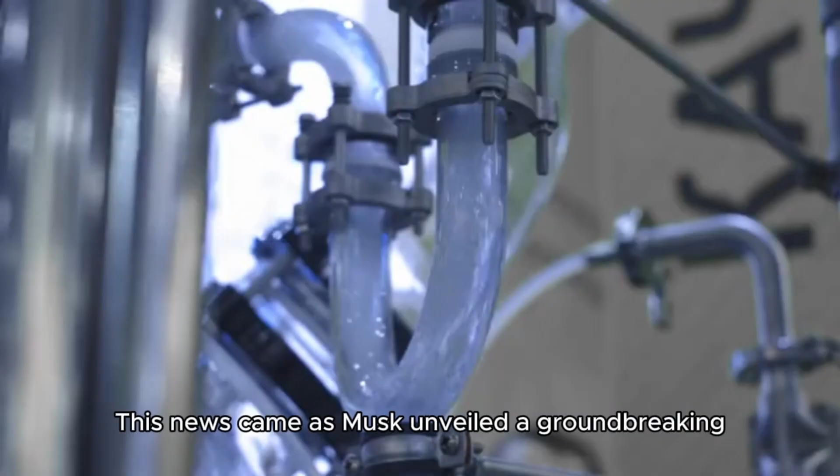Elon Musk has made an exciting announcement about the approval to make the first cars, possibly as soon as October. This news came as Musk unveiled a groundbreaking new water engine that promises to revolutionize the future of transportation and energy. After years of skepticism and numerous innovations, Musk's latest venture paves the way for unparalleled environmental sustainability. But what makes this water engine so unique, and how will it impact the world? Join us as we delve into the mechanics of Musk's incredible invention and explore the far-reaching implications of this game-changing technology.

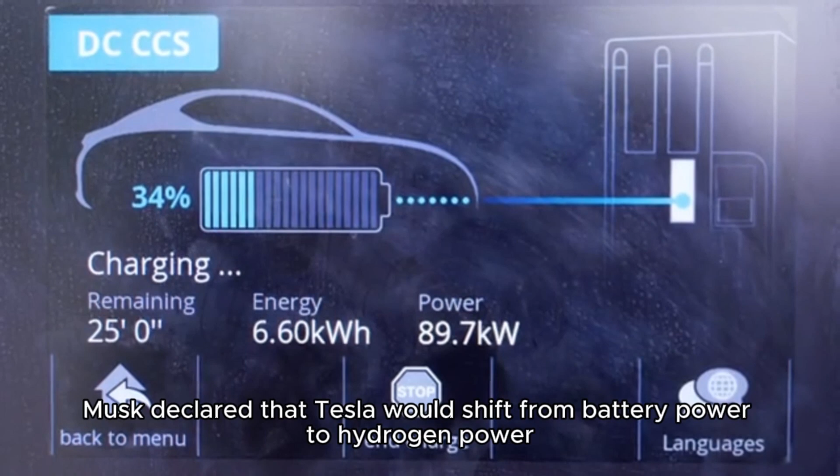Elon Musk abruptly announced a major change in Tesla's direction on X, formerly known as Twitter. In an unexpected twist, after years of doubt surrounding hydrogen fuel cells, Musk declared that Tesla would shift from battery power to hydrogen power. This decision marked a significant change in Tesla's business strategy. Many were surprised by the announcement, given Musk's previous criticism of hydrogen fuel cells, which he famously referred to as fool cells. The shift was driven by challenges in mass-producing the 4680 battery cells, prompting Tesla to reconsider its approach to sustainable energy solutions.

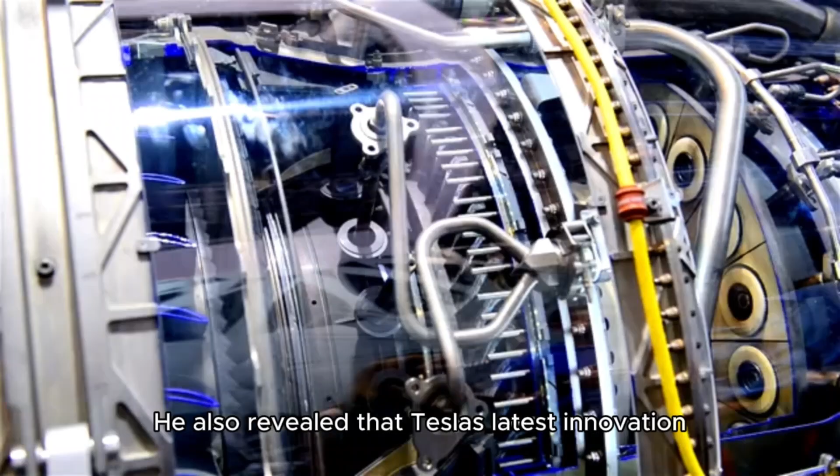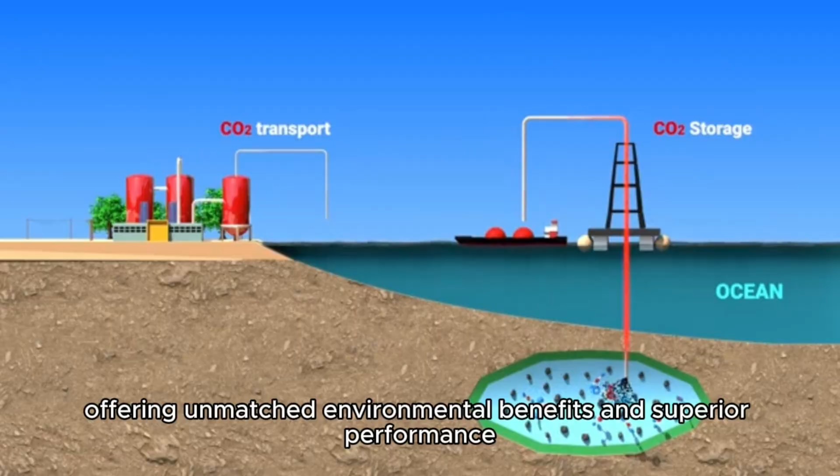However, Musk didn't stop there. He also revealed that Tesla's latest innovation, the revolutionary water engine, would be at the forefront of this transition. This groundbreaking technology promises to redefine how engines work, offering unmatched environmental benefits and superior performance. What makes the water engine so revolutionary, and how will it impact the automotive industry and beyond?

Elon Musk, the visionary behind Tesla and SpaceX, has always been driven by a commitment to cutting-edge technology and environmental sustainability. His goal is to create a future where technology enhances our lives while protecting the planet. Musk's relentless pursuit of innovation has consistently pushed the boundaries of what is possible, earning him a reputation as a modern-day pioneer.

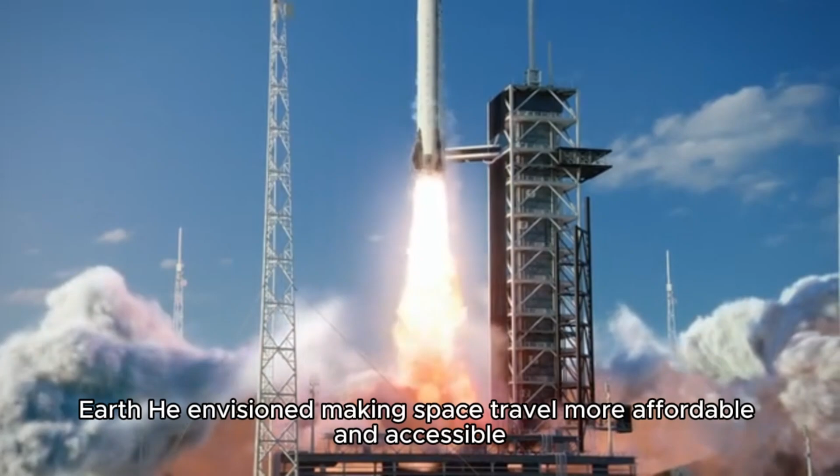Musk's vision for Tesla wasn't just about creating electric cars, but about transforming the entire automotive industry. He aimed to show that electric vehicles could be faster, safer, and more enjoyable to drive than their gasoline-powered counterparts. This mission extended beyond cars; it was about accelerating the world's transition to sustainable energy. With SpaceX, Musk's ambitions went beyond Earth. He envisioned making space travel more affordable and accessible, with the ultimate goal of colonizing Mars.

SpaceX's achievements, including the successful landing and reuse of rockets, have revolutionized the space industry, demonstrating Musk's ability to turn ambitious dreams into reality. Musk's journey in renewable energy and transportation is marked by several key milestones.

Tesla, founded in 2003, initially faced skepticism. At the time, electric cars were considered impractical and inefficient. However, Musk's perseverance paid off. Tesla's first vehicle, the Roadster, showcased the potential of electric cars with its impressive performance and range.

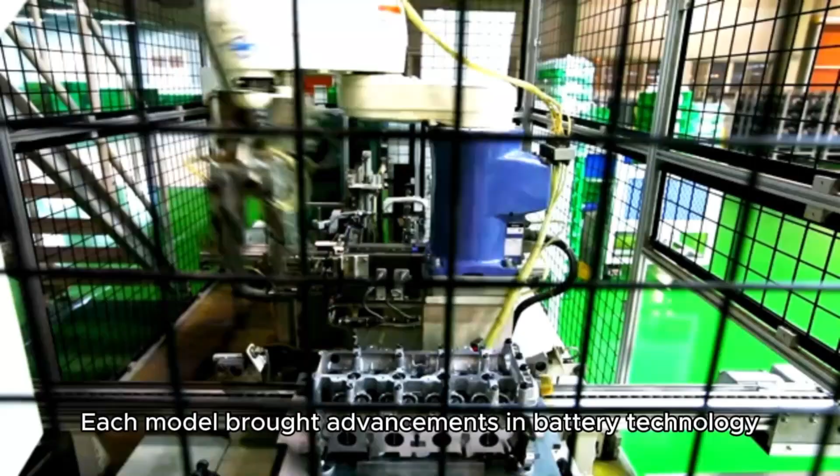The subsequent releases of the Model S, Model X, Model 3, and Model Y solidified Tesla's position as a leader in the electric vehicle market. Each model brought advancements in battery technology, driving range, and autonomous driving capabilities, making electric cars increasingly viable for everyday use.

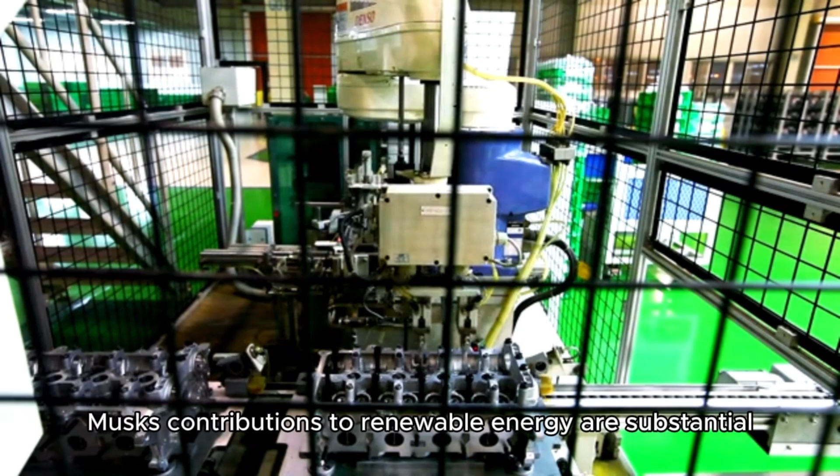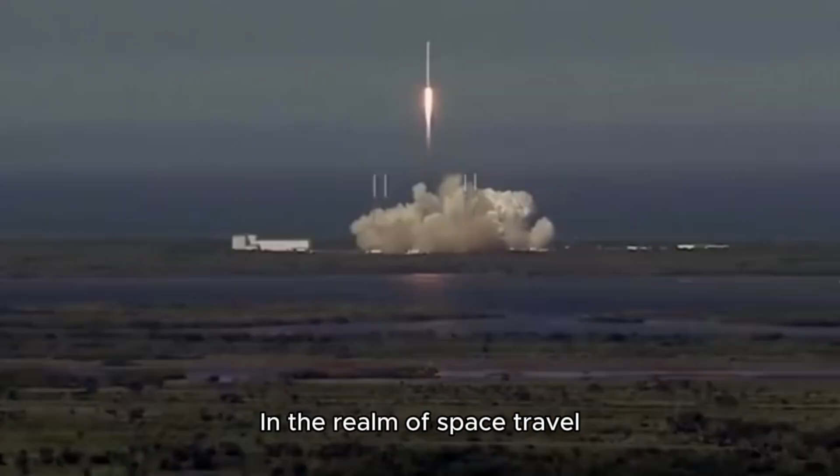Beyond vehicles, Musk's contributions to renewable energy are substantial. Tesla's Powerwall and solar roof products aim to create a sustainable energy ecosystem for homes and businesses by integrating solar energy generation with efficient energy storage. Through these innovations, Musk has provided practical solutions for reducing dependence on fossil fuels.

In the realm of space travel, SpaceX has achieved remarkable milestones. The Falcon 9 rocket's ability to land and be reused has significantly reduced the cost of space missions. The successful deployment of the Starlink satellite constellation, which aims to provide global internet coverage, further emphasizes Musk's far-reaching impact on technology and innovation.

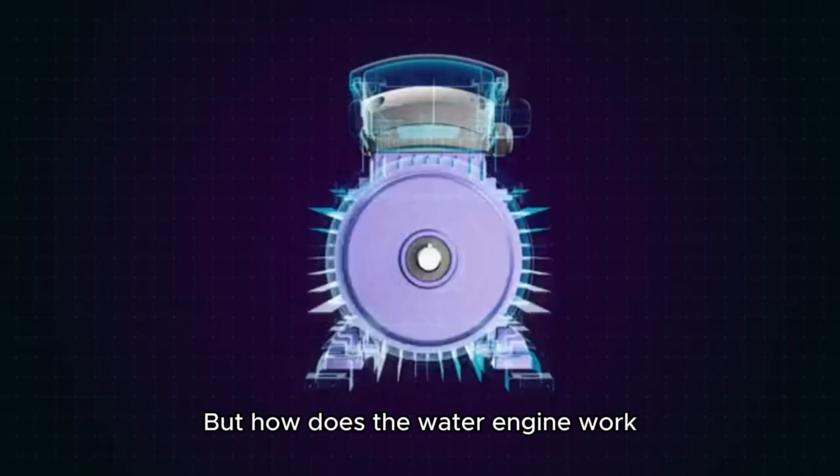The water engine operates on a simple yet ingenious principle: it uses water to generate energy. This process fundamentally distinguishes it from traditional combustion engines, which rely on burning fossil fuels, and from electric engines, which depend on battery power. But how does the water engine work?

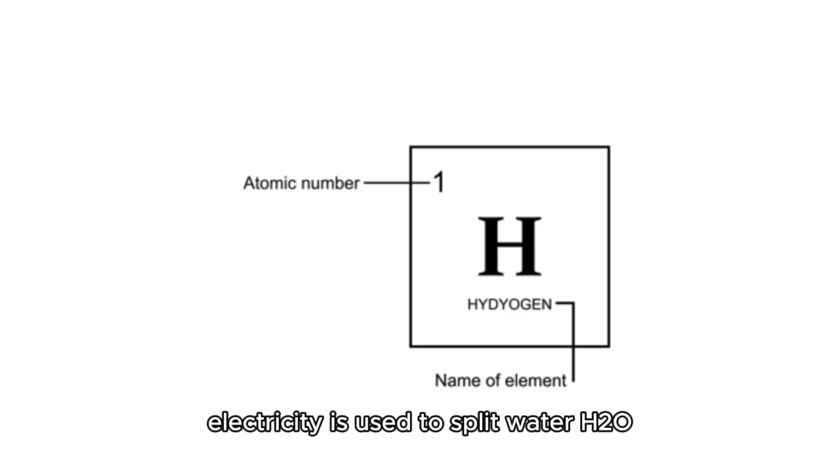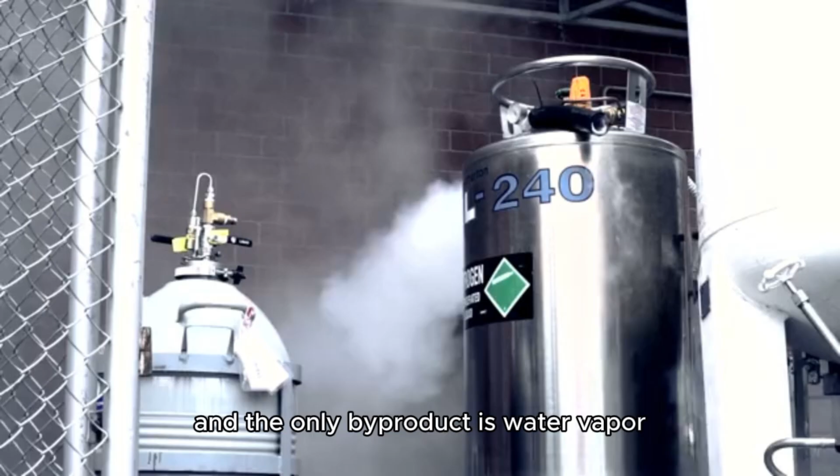At its core, the engine uses a method called reverse electrolysis. In conventional electrolysis, electricity is used to split water, H2O, into hydrogen (H) and oxygen (O). In reverse electrolysis, the process is flipped: hydrogen and oxygen are combined to produce electricity, and the only byproduct is water vapor, making this an exceptionally clean technology.

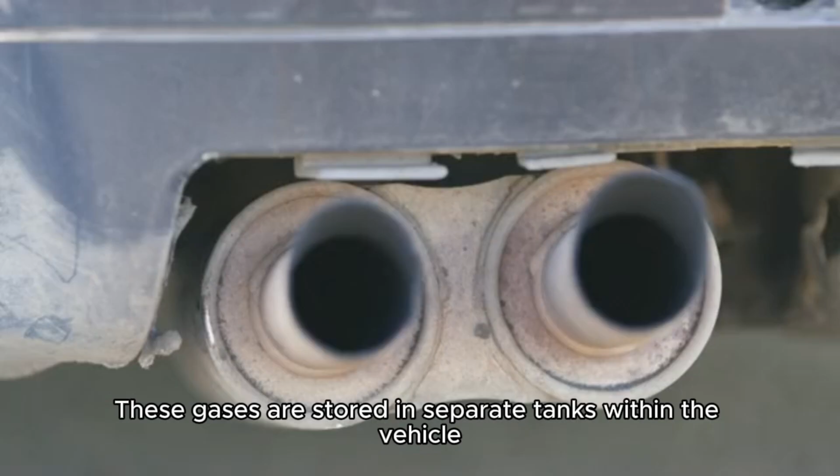So, what are the mechanics behind this impressive technology? The water engine's mechanics are a blend of fuel cells, reverse electrolysis, and hydrogen-oxygen reactions. Let's break it down step by step. First, water is introduced into the system.

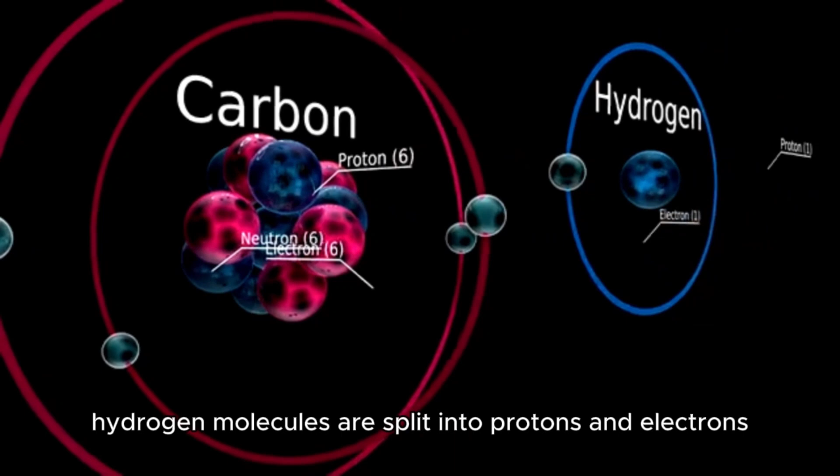The engine then splits the water into hydrogen and oxygen using an initial energy input. These gases are stored in separate tanks within the vehicle. When the engine is running, hydrogen from the tank is fed into the fuel cell. In the fuel cell, hydrogen molecules are split into protons and electrons.

The electrons are used to create an electric current, which powers the vehicle's electric motor. Meanwhile, the protons move through a membrane and combine with oxygen from the air, producing water vapor as the only emission. This process is incredibly efficient, continuously generating electricity as long as hydrogen and oxygen are available.

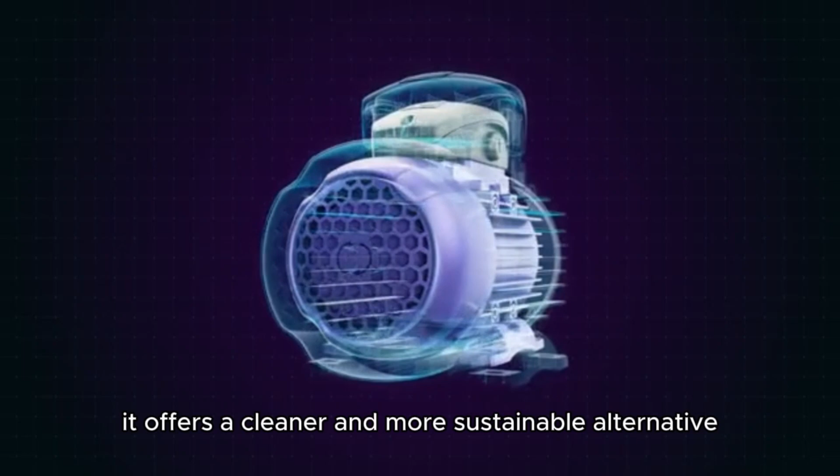But how efficient is the water engine compared to traditional and electric engines? The answer is quite promising. Traditional combustion engines have an efficiency rate of about 20 to 30%, meaning a significant amount of energy is lost as heat. Electric engines, while more efficient at around 85 to 90%, still face challenges such as long charging times and battery degradation. The water engine, however, boasts an efficiency of approximately 60%, placing it between combustion and electric engines. More importantly, it offers a cleaner and more sustainable alternative.

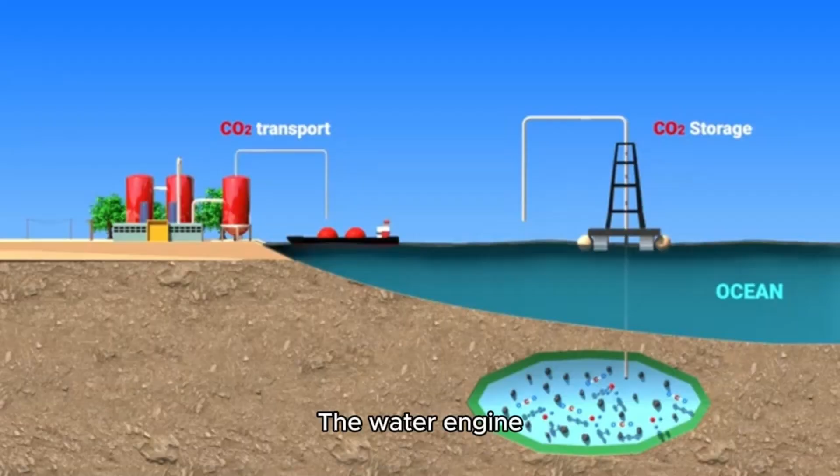Another critical performance metric is range. Traditional electric vehicles, EVs, often suffer from range anxiety, with current models typically offering between 200 to 300 miles per charge. The water engine, leveraging the high energy density of hydrogen, can achieve ranges comparable to or even exceeding those of fossil fuel-powered vehicles. Imagine driving a car that emits only water vapor and never worrying about running out of power during a trip.

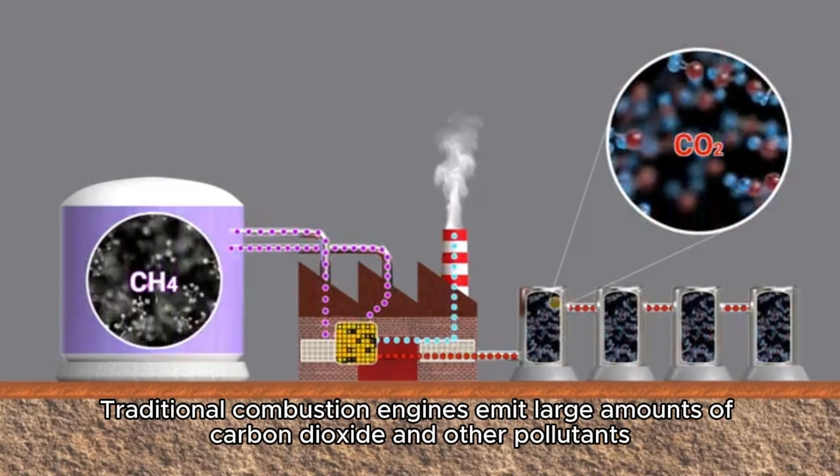One of the most significant advantages of the water engine is its potential to drastically reduce our carbon footprint. Traditional combustion engines emit large amounts of carbon dioxide and other pollutants, contributing to climate change and air pollution. In contrast, the water engine produces only water vapor as a byproduct, making it an exceptionally clean alternative. To put this into perspective, the average gasoline-powered car emits about 4.6 metric tons of carbon dioxide annually.

Transitioning to water engines could eliminate these emissions entirely. Moreover, the elimination of nitrogen oxides and particulate matter would lead to significant improvements in air quality, particularly in urban areas. Comparatively, electric vehicles are also cleaner than fossil fuel-powered cars, but are not without their environmental costs.

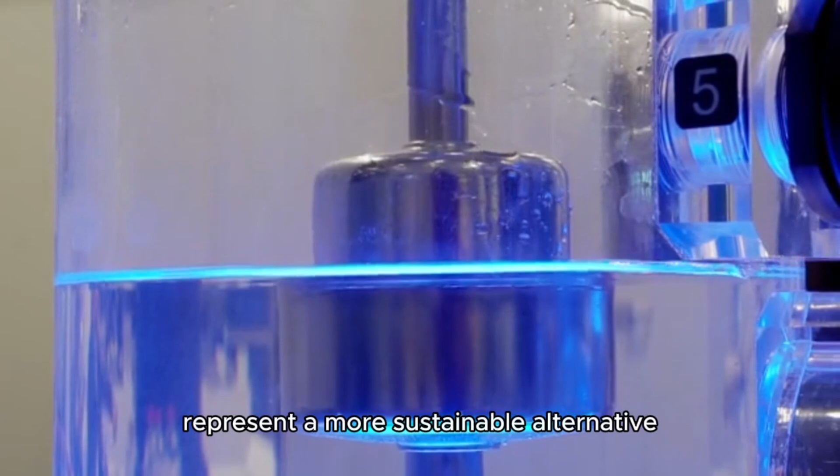The mining of lithium, cobalt, and other rare earth metals required for batteries has substantial ecological impacts. Additionally, if the electricity used to charge EVs is sourced from non-renewable power plants, the overall reduction in carbon emissions is less pronounced. Hydrogen fuel cells, however, represent a more sustainable alternative.

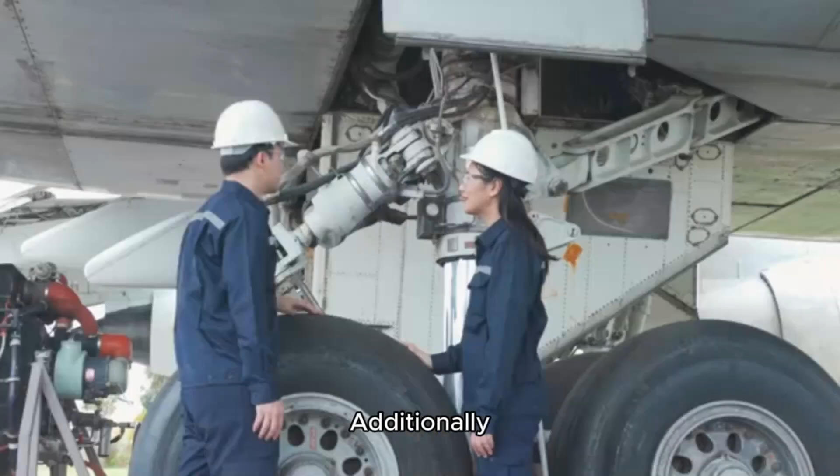Another clean alternative produces only water as a byproduct. However, the production of hydrogen typically involves natural gas, which results in indirect carbon emissions. Additionally, hydrogen storage and transportation pose challenges due to its low energy density and the need for high-pressure tanks.

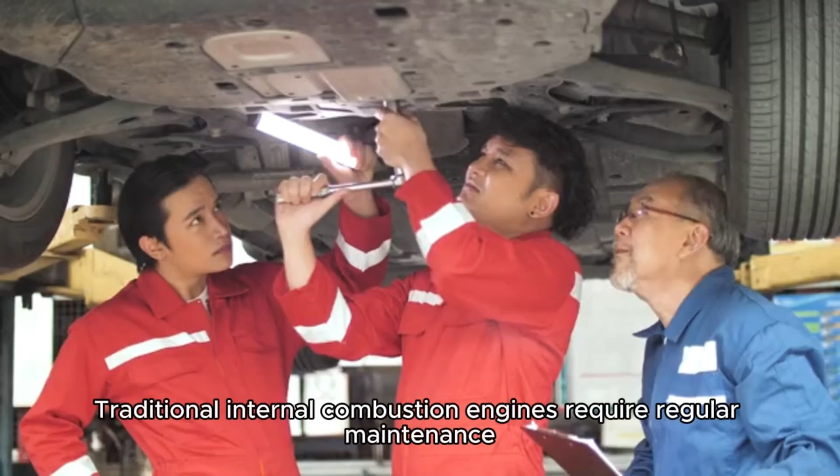The water engine, utilizing reverse electrolysis, has the potential to offer a more efficient and environmentally friendly solution. By using renewable energy sources to produce hydrogen, the entire life cycle of the water engine becomes sustainable, further reducing its environmental footprint. Economically, the water engine could bring substantial cost savings in the long run.

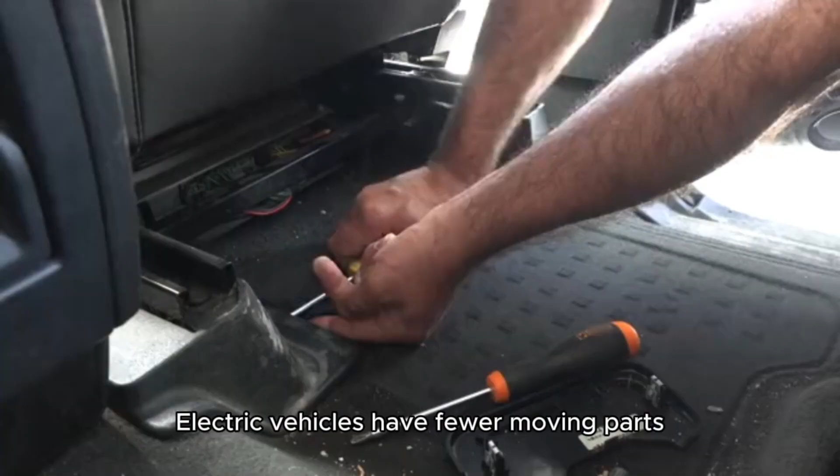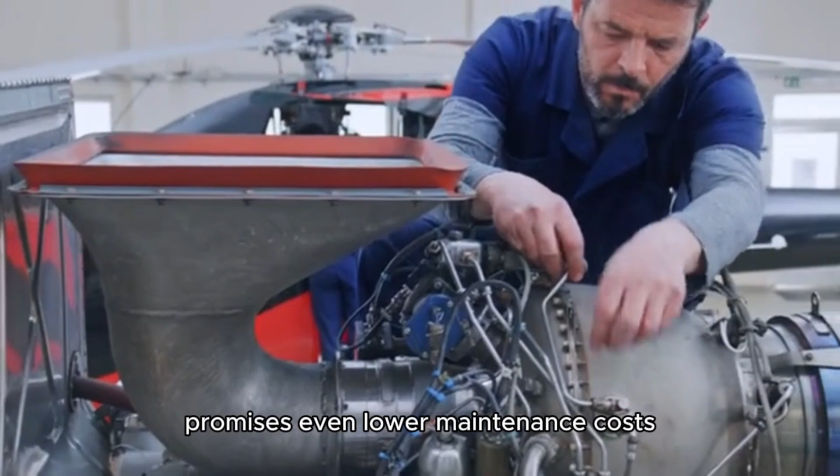Traditional internal combustion engines require regular maintenance, including oil changes, exhaust system repairs, and engine tune-ups, which can be expensive over time. Electric vehicles have fewer moving parts, reducing maintenance costs, but still require costly battery replacements that are environmentally taxing. The water engine, with its simpler mechanics and fewer moving parts, promises even lower maintenance costs.

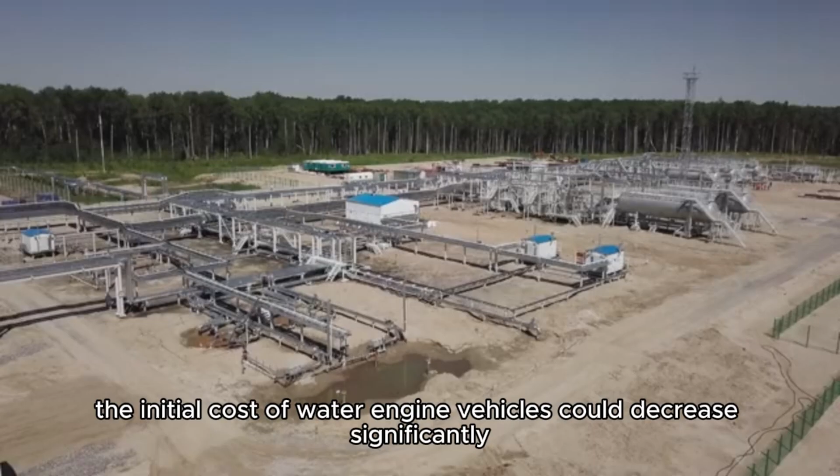Components like fuel cells and electrolysis systems are designed for durability, potentially extending the lifespan of vehicles. As the technology matures and economies of scale are realized, the initial cost of water engine vehicles could decrease significantly, making them more accessible to the average consumer. However, the transition to water engines will require significant initial investment.

Developing the infrastructure for water refueling stations is a massive undertaking. This involves either building new stations or retrofitting existing ones to accommodate water refueling technology. The cost and logistics of establishing a widespread network of refueling stations will require substantial collaboration between governments and private companies.

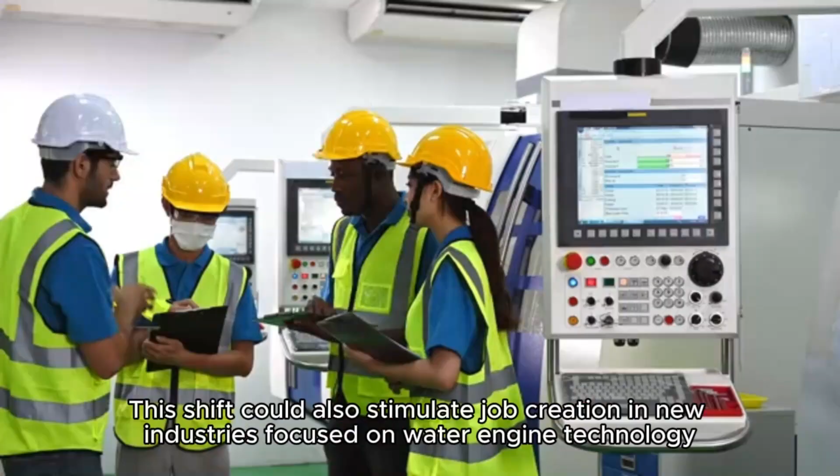On a broader economic scale, the adoption of water engines could reduce global dependence on oil, leading to more stable fuel prices and potentially reducing geopolitical tensions linked to oil supply. This shift could also stimulate job creation in new industries focused on water engine technology, manufacturing, and infrastructure development.

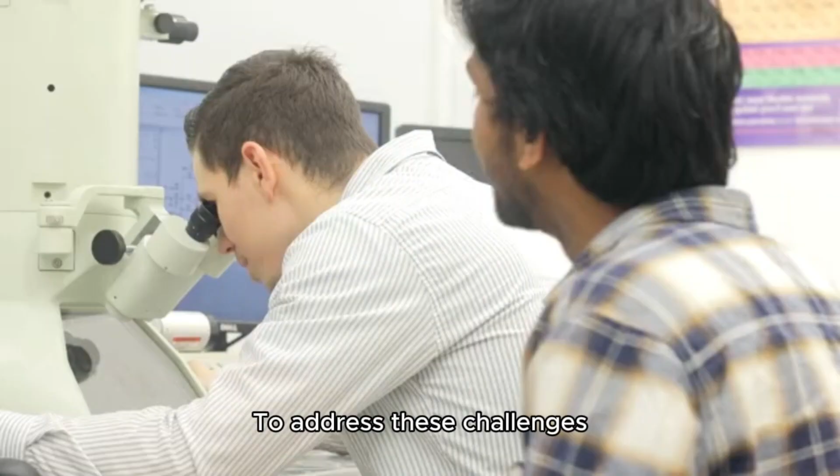The introduction of the water engine represents a significant technological shift in the automotive industry. Transitioning from combustion engines and electric vehicles to water engines involves overcoming various challenges. The current automotive infrastructure is fully rooted in fossil fuels, from manufacturing processes to refueling networks.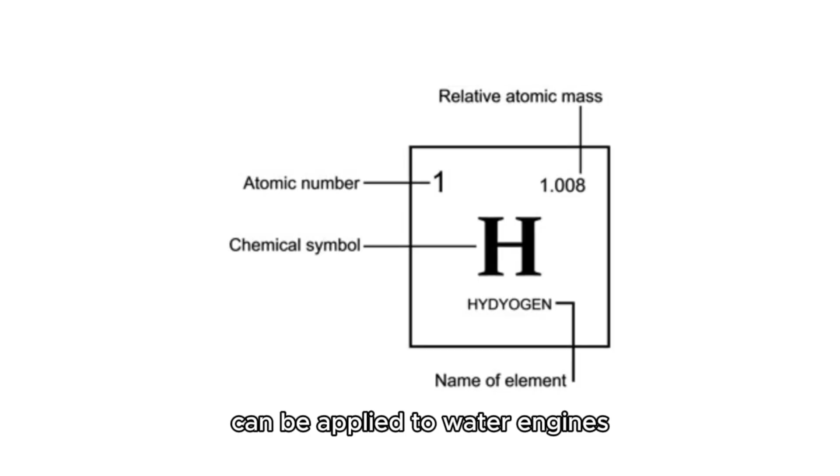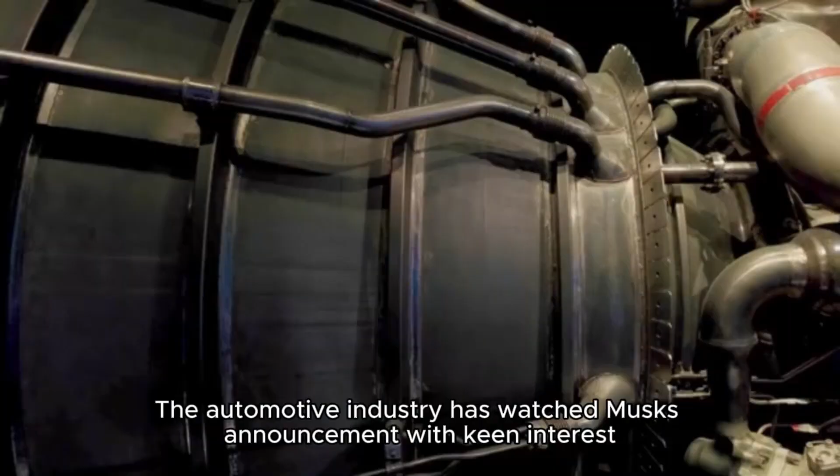To address these challenges, companies can leverage existing technologies and expertise. For example, many principles from hydrogen fuel cell technology, such as fuel cell design and hydrogen storage, can be applied to water engines. This can facilitate faster development and deployment of the new technology.

But what does the future hold for Musk's water engine? Will it redefine our approach to energy and transportation, or will it face insurmountable obstacles?

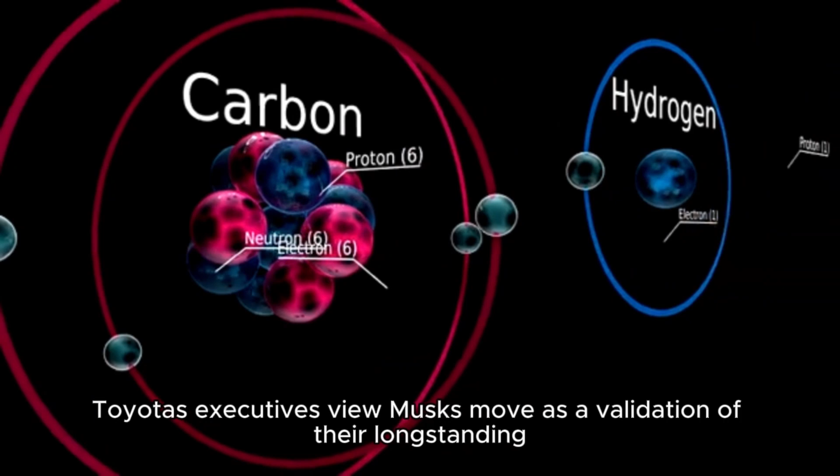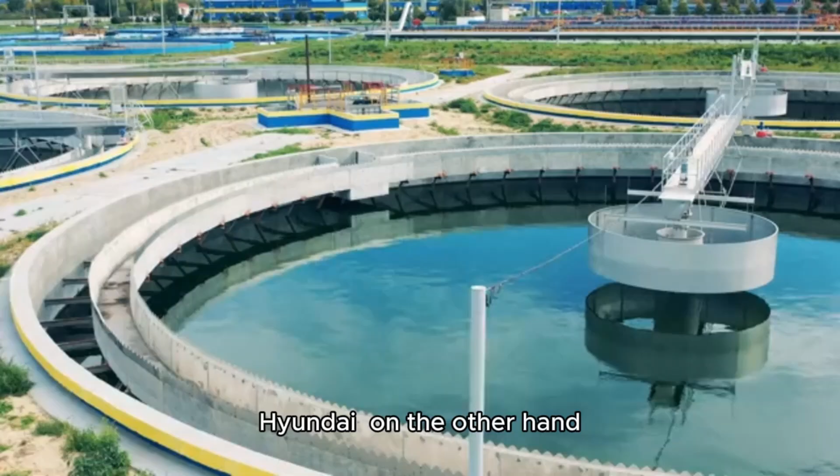The automotive industry has watched Musk's announcement with keen interest. Major players like Toyota and Hyundai, longtime advocates of hydrogen fuel cell technology, have had mixed reactions. Toyota has invested heavily in hydrogen fuel cells with vehicles like the Mirai, and Hyundai has introduced models like the Nexo. Toyota's executives view Musk's move as a validation of their long-standing belief in hydrogen's potential.

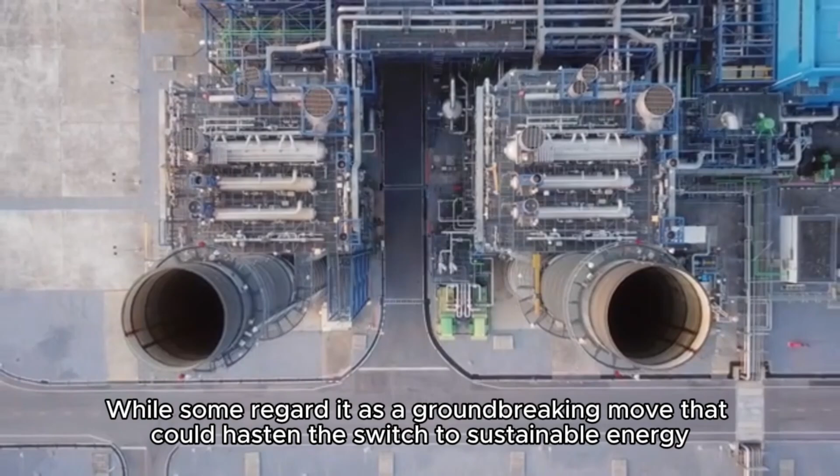They see it as a positive step toward wider acceptance and investment in hydrogen infrastructure. Hyundai, on the other hand, is cautiously optimistic, recognizing the competitive push but also the significant market development needed to support both hydrogen and water engine technologies.

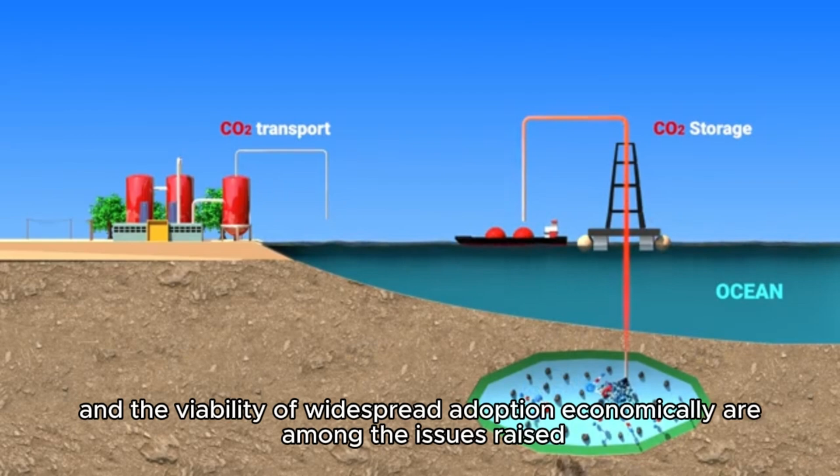The feasibility of the water engine has been discussed by analysts and industry specialists. While some regard it as a groundbreaking move that could hasten the switch to sustainable energy, others are dubious about the real-world difficulties. The technology's efficiency, the infrastructure needed for water refueling, and the viability of widespread adoption economically are among the issues raised.

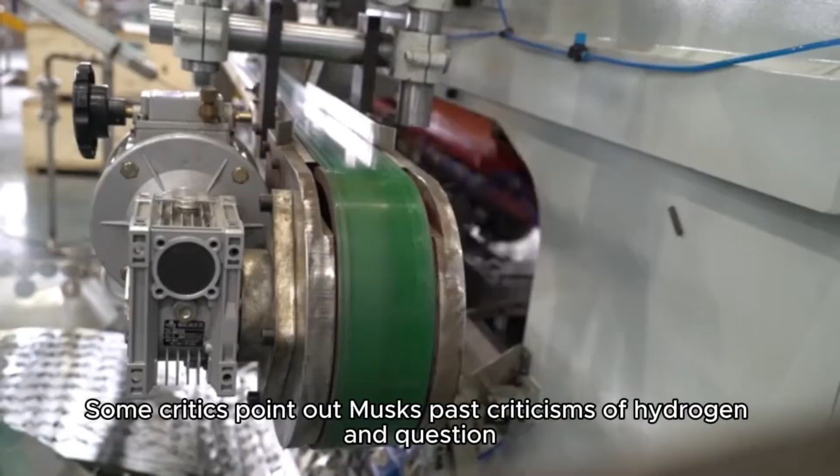Public reaction to Musk's announcement has been a mix of excitement, curiosity, and skepticism. Social media platforms have been abuzz with discussions, as followers of Musk and Tesla enthusiasts express their anticipation for the new technology. Many are intrigued by the promise of a cleaner, more efficient engine and the potential environmental benefits.

However, there are also doubts and concerns. Some critics point out Musk's past criticisms of hydrogen and question the feasibility of a rapid transition to water engines. They worry about the practicality of building a new refueling infrastructure and the initial costs associated with adopting the technology. Will Musk's water engine prove to be the game-changer it promises?

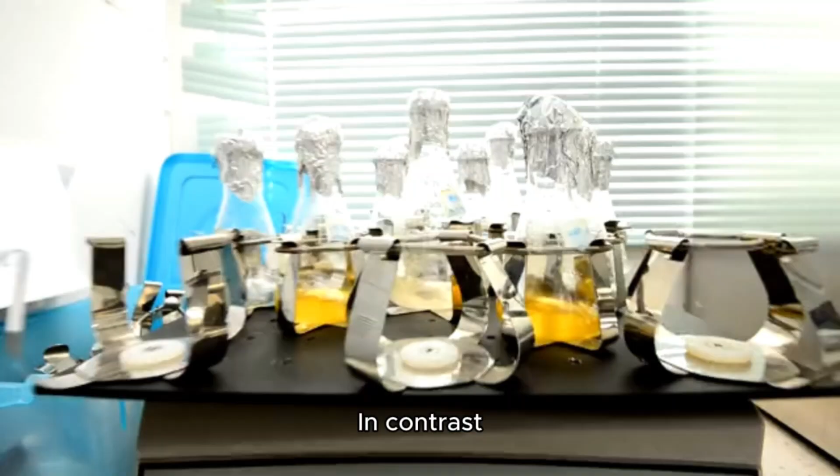One of the most significant challenges in deploying the water engine is the development of a comprehensive refueling infrastructure. Currently, the infrastructure for traditional fossil fuels is extensive, with gas stations available in almost every corner of the globe. Electric vehicle charging networks are also expanding rapidly, thanks in large part to investments by Tesla and other companies.

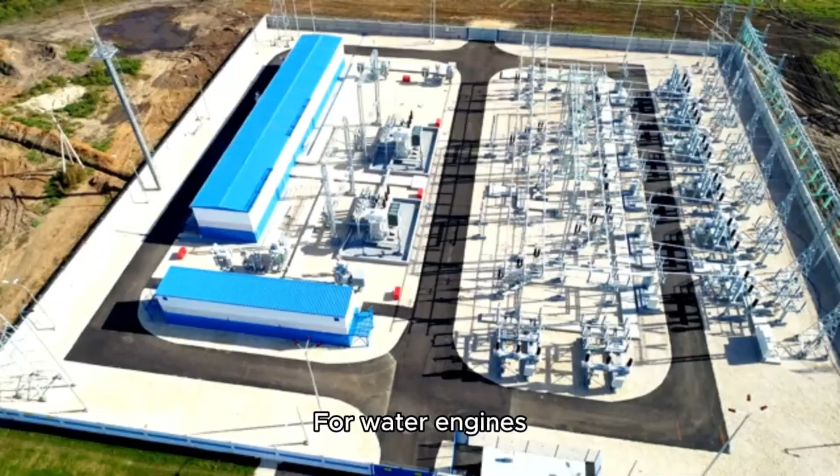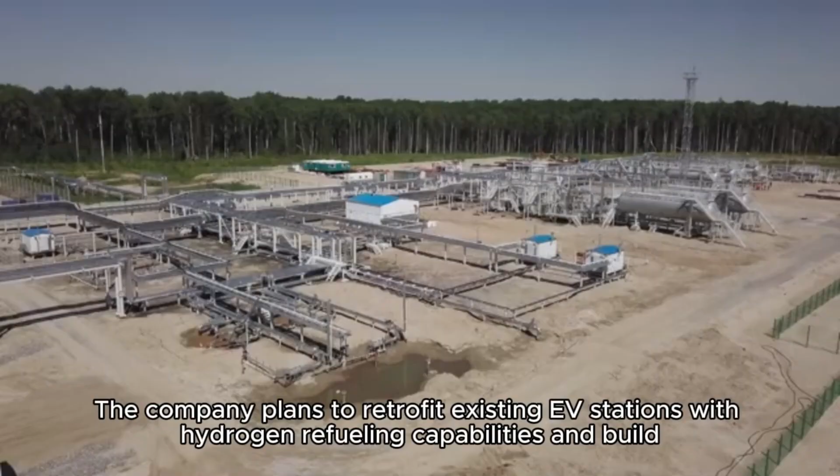In contrast, the infrastructure for hydrogen fuel cells is still in its infancy. There are relatively few hydrogen refueling stations worldwide, concentrated mainly in specific regions like California, Japan, and parts of Europe. For water engines, which rely on a similar hydrogen-based refueling process, this existing network provides a starting point, but significant expansion is required. Tesla's approach to solving this involves leveraging its experience in building out EV supercharging stations.

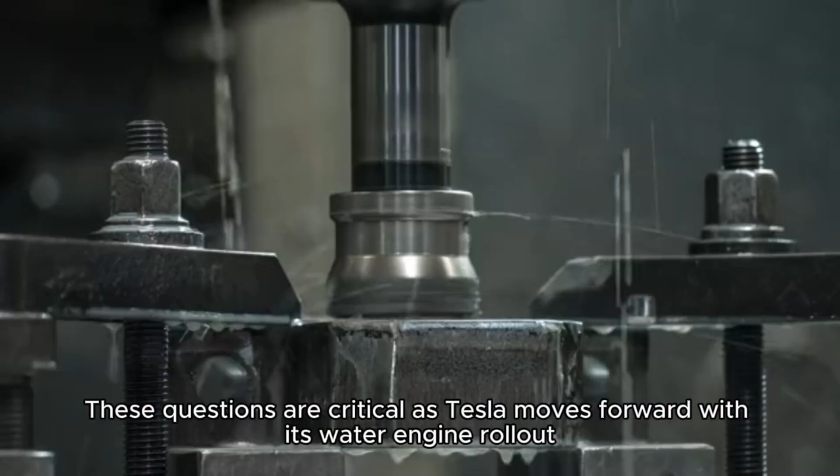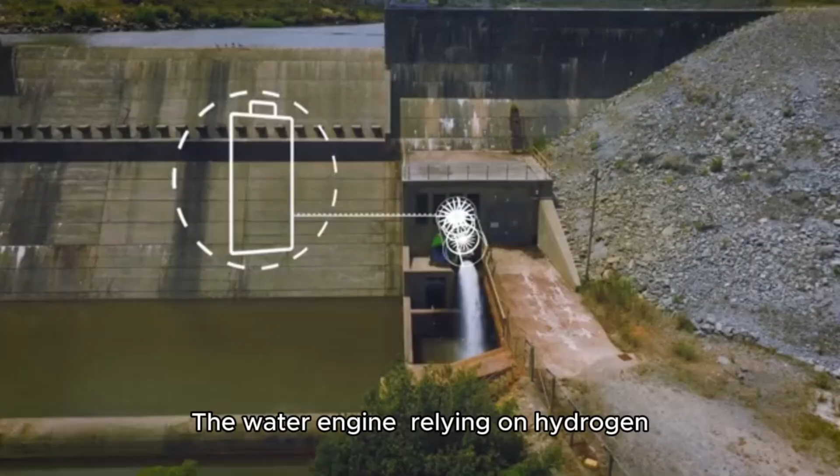The company plans to retrofit existing EV stations with hydrogen refueling capabilities and build new stations dedicated to water engines. This ambitious plan will require substantial investment and collaboration with governments and private sector partners to ensure widespread availability and convenience for consumers. But how quickly can this network be established? What are the logistical and financial hurdles that need to be overcome? These questions are critical as Tesla moves forward with its water engine rollout.

Safety is another paramount concern when introducing a new technology. Hydrogen, while a clean energy source, is highly flammable and must be handled with care. The water engine, relying on hydrogen, inherits these safety challenges.

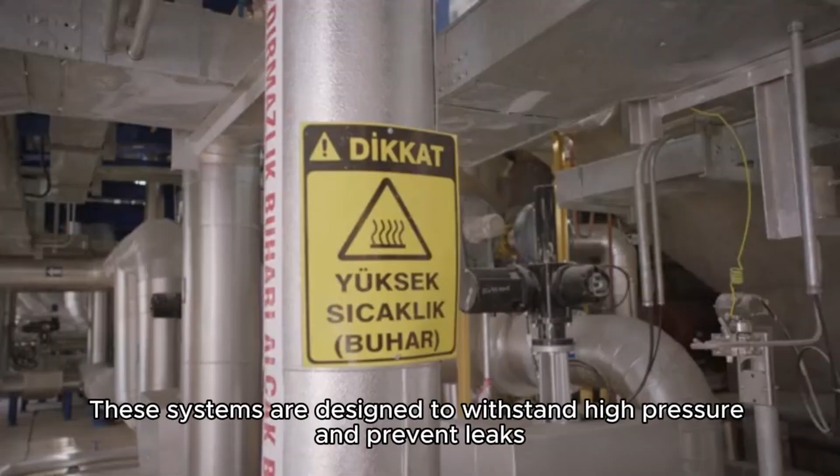To address these potential risks, Tesla has implemented several safety measures. First, advanced hydrogen storage systems have been developed to ensure that hydrogen is stored safely and securely within the vehicle. These systems are designed to withstand high pressure and prevent leaks. Tesla's rigorous testing procedures for the water engine and hydrogen storage systems aim to meet and exceed safety standards set by international regulatory bodies. By prioritizing safety at every stage of development and deployment, Tesla is committed to making the water engine as reliable and secure as possible.

But can these safety measures alleviate public concerns? What additional steps can be taken to ensure the technology is perceived as safe and trustworthy?

Navigating the complex legal and regulatory landscape is another significant challenge for Tesla's water engine. Different countries have varying regulations regarding the production, storage, and transportation of hydrogen, adding layers of complexity to the global rollout of this technology. Tesla has proactively engaged with regulatory authorities worldwide to ensure compliance with all relevant standards. This involves extensive documentation, rigorous testing, and ongoing dialogue with regulators to address any concerns and adapt to evolving requirements.

These efforts are crucial in overcoming regulatory hurdles, but what are the specific challenges in different regions? How will Tesla's proactive approach influence the adoption of this new technology on a global scale?

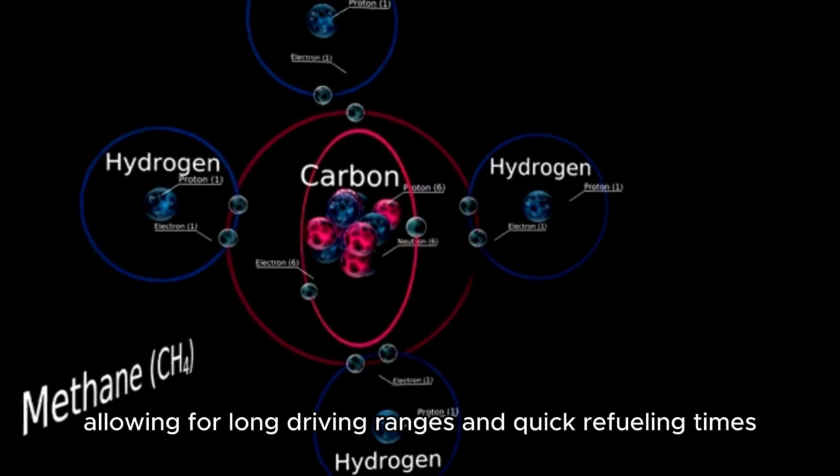Each technology has its unique strengths and weaknesses. Hydrogen fuel cells offer high energy density, allowing for long driving ranges and quick refueling times. They emit only water vapor, making them environmentally friendly. However, challenges arise in producing, storing, and transporting hydrogen gas, which is highly flammable and requires specialized infrastructure. Water engines present a notable advantage with on-demand...

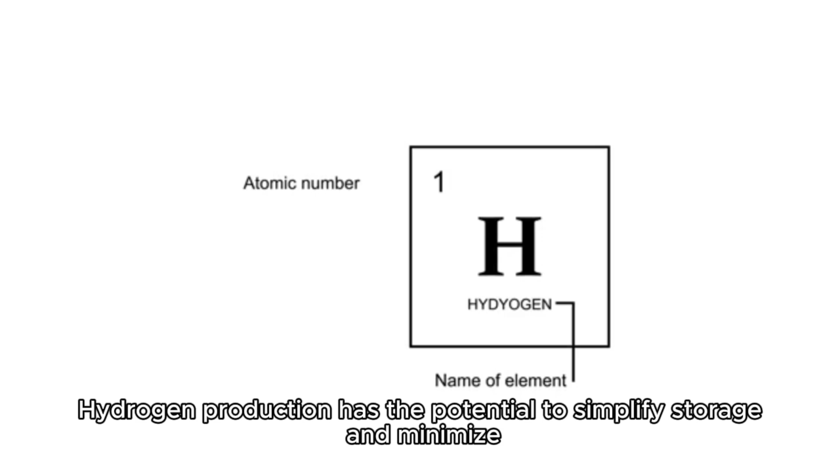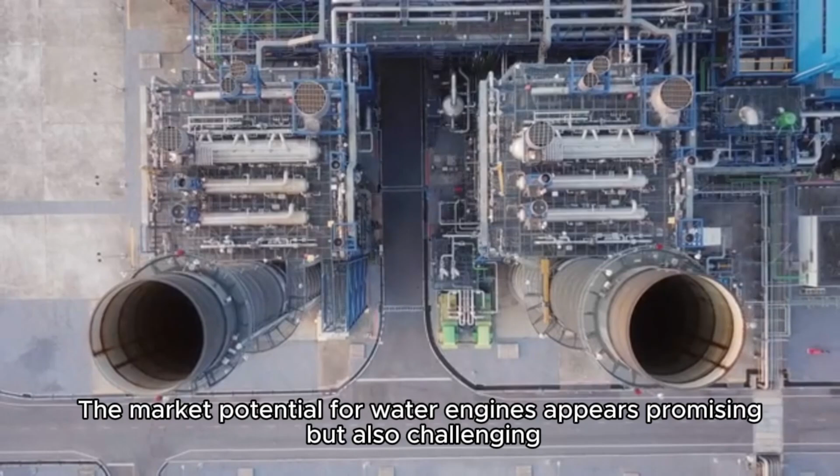Hydrogen production has the potential to simplify storage and minimize risks associated with hydrogen gas handling. Additionally, this method can integrate well with renewable energy sources, enhancing sustainability. However, the reverse electrolysis process requires significant initial energy input, which can affect overall efficiency.

The market potential for water engines appears promising but also challenging. The automotive industry is keen on reducing carbon emissions and adopting sustainable energy sources. Governments worldwide are setting strict emissions targets and offering incentives for clean energy technologies, creating a favorable environment for innovation. Forecasting adoption rates involves evaluating technological advancements, infrastructure development, and consumer acceptance.

Initially, water engines may appeal to early adopters and environmentally conscious consumers. As technology improves and costs decrease, broader adoption is likely. According to analysts, water engines could gain substantial market share in the next 10 years if Tesla can resolve issues with efficiency and infrastructure to scale up manufacturing and deployment. Partnerships with the public and commercial sectors will be essential.

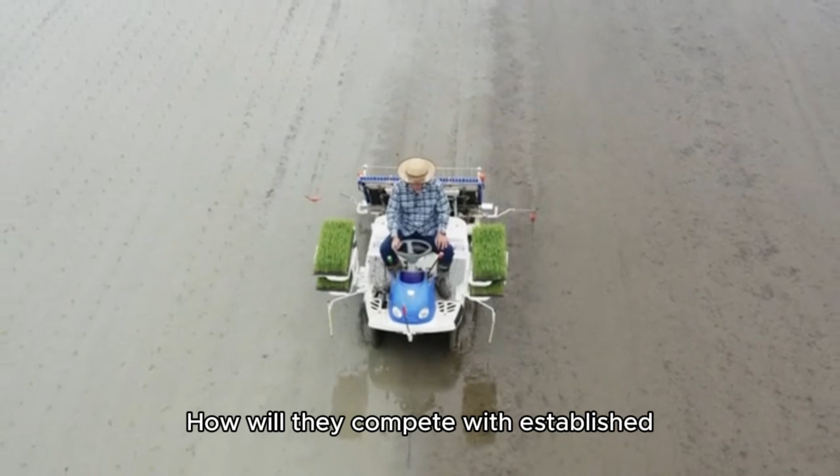But what will it take for water engines to truly revolutionize the transportation industry? How will they compete with established technologies and navigate the evolving landscape of sustainable energy?

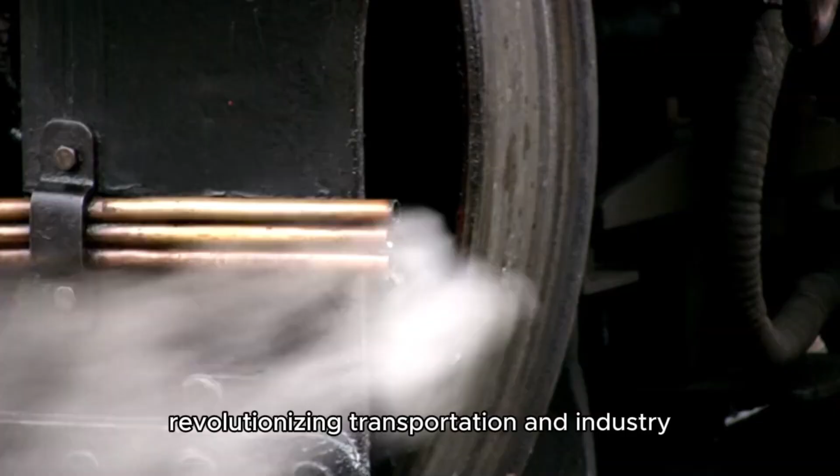The journey of engine technology began with the invention of the steam engine in the late 17th century. Thomas Newcomen and James Watt improved steam engines, revolutionizing transportation and industry. These early engines were crucial in driving the Industrial Revolution, powering locomotives, ships, and factories.

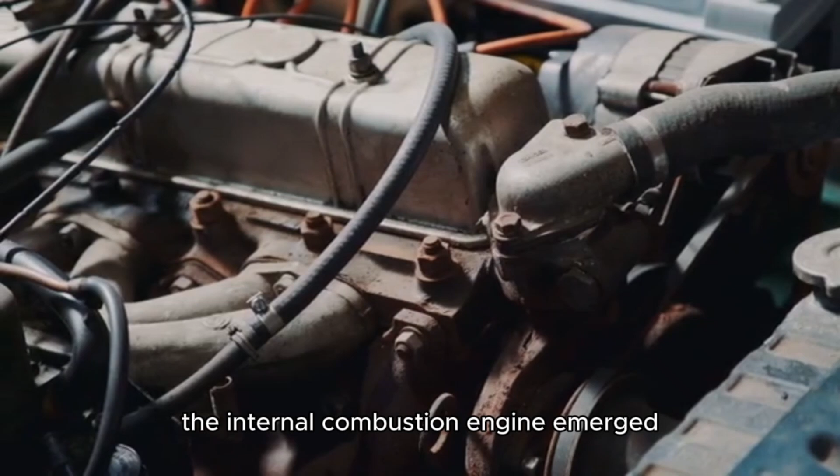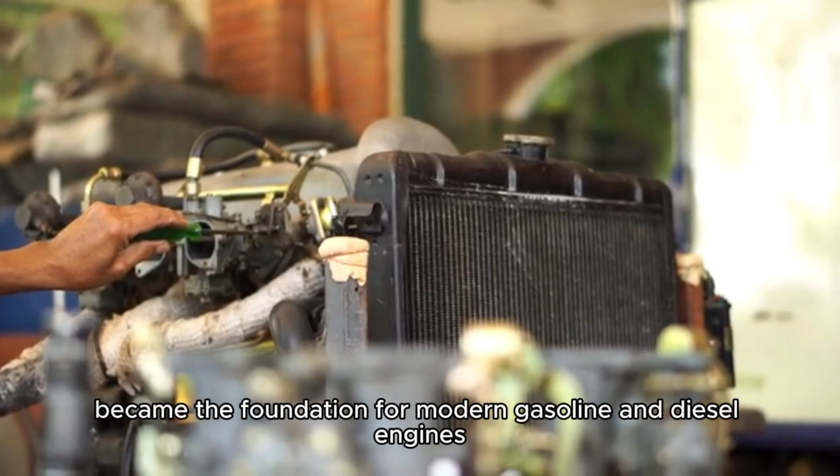In the late 19th century, the internal combustion engine emerged, developed by inventors like Nikolaus Otto and Rudolf Diesel. Otto's four-stroke engine and Diesel's compression ignition engine became the foundation for modern gasoline and diesel engines. These engines offered greater efficiency and power, leading to their widespread adoption in automobiles, aircraft, and ships.

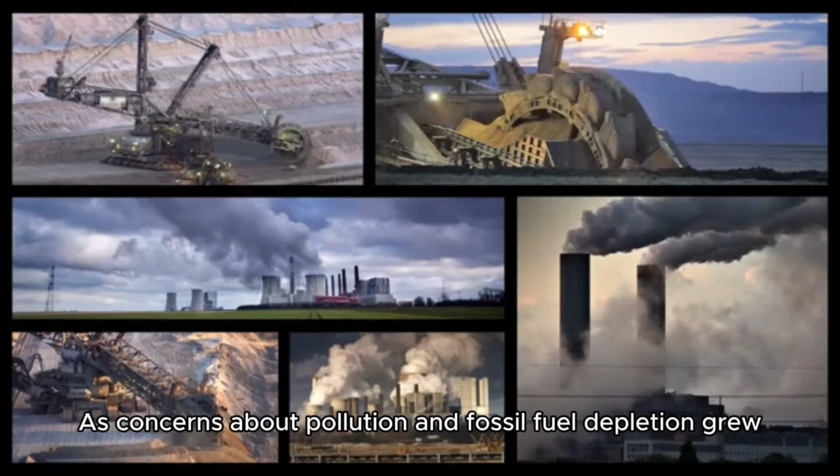The 20th century saw significant refinements in internal combustion engines, with advancements in materials, fuel injection systems, and turbocharging. These improvements enhanced performance, fuel efficiency, and emissions control, making internal combustion engines the dominant force in transportation. As concerns about pollution and fossil fuel depletion grew, the search for alternative fuel engines intensified.

This brings us to the late 20th and early 21st centuries, where electric vehicles, EVs, began to gain traction. Companies like Tesla, under Elon Musk's leadership, spearheaded the EV revolution with advancements in battery technology, range, and charging infrastructure.

Before Musk's water engine, there had been numerous attempts to develop alternative fuel engines. One notable effort was the development of hydrogen fuel cells. In the 1960s, NASA used hydrogen fuel cells to power spacecraft in the Apollo missions, demonstrating the technology's potential. However, commercial adoption faced significant hurdles, including hydrogen production, storage, and infrastructure challenges.

Another notable attempt was the development of biofuel engines. In the early 2000s, there was a surge in interest in biofuels such as ethanol and biodiesel, derived from plants and organic waste. While biofuels offered a renewable energy source, they also faced challenges. The production of biofuels required large amounts of agricultural land and water, raising concerns about food security and environmental sustainability.

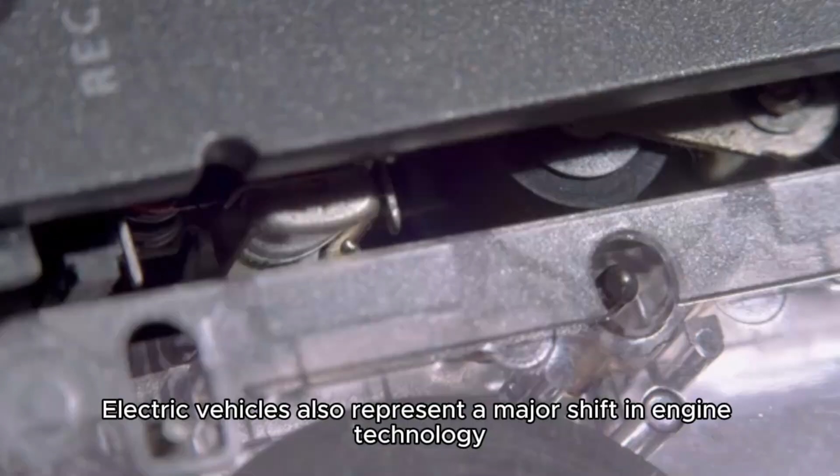Electric vehicles also represent a major shift in engine technology. Early EVs, such as General Motors' EV1 in the 1990s, showcased the potential of electric propulsion. However, limited range, high costs, and inadequate charging infrastructure hindered widespread adoption. It wasn't until advancements in lithium-ion batteries and the establishment of extensive charging networks that EVs began to thrive.

The history of alternative fuel engines offers valuable lessons that inform Musk's current project. One key lesson is the importance of infrastructure. Hydrogen fuel cells and early EVs struggled with infrastructure challenges. Musk's plan to leverage Tesla's existing supercharger network for hydrogen refueling addresses this critical barrier.

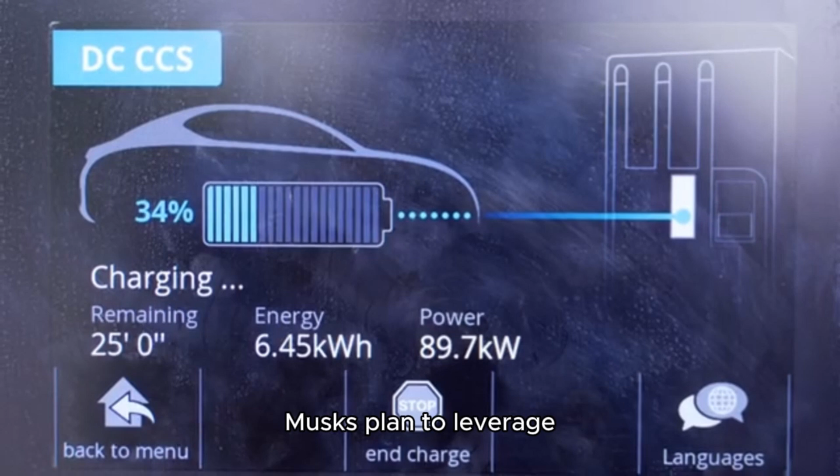A further lesson pertains to the importance of energy efficiency. Despite being renewable, biofuels frequently used more energy during production than they produced. Musk aims to maximize energy efficiency by focusing on reverse electrolysis in the water engine, making sure that the process of splitting water and recombining hydrogen and oxygen is as effective as possible.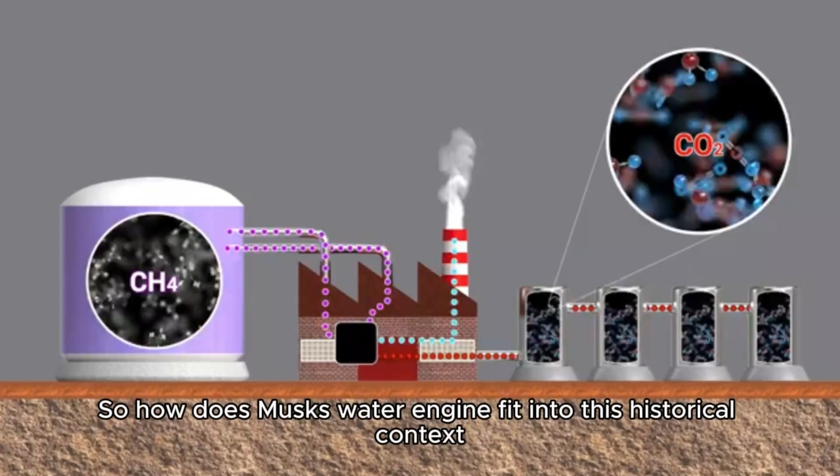So how does Musk's water engine fit into this historical context? It represents the latest evolution in the ongoing quest for cleaner, more sustainable engine technology. By building on past successes and learning from the challenges of previous innovations, Musk is pushing the boundaries once again.

A number of businesses and innovations could compete with Tesla's water engine. The Nikola Corporation specializes in trucks that run on hydrogen. Despite numerous setbacks, Nikola has made significant strides toward creating heavy-duty vehicles that run on hydrogen fuel cells. Their emphasis on the business market may give Tesla fierce rivalry, particularly in long-distance travel.

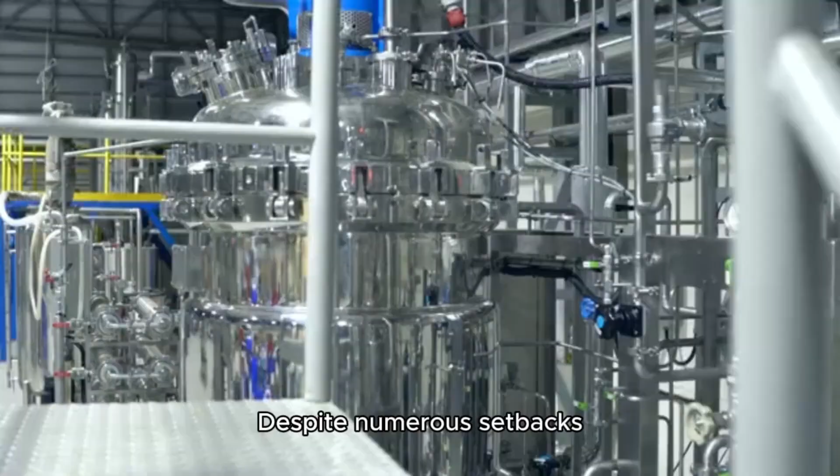BMW is also exploring hydrogen fuel cell technology, having unveiled prototypes and committed to further research. With their strong brand and engineering prowess, BMW could present a formidable challenge to Tesla's water engine, particularly in the luxury vehicle market.

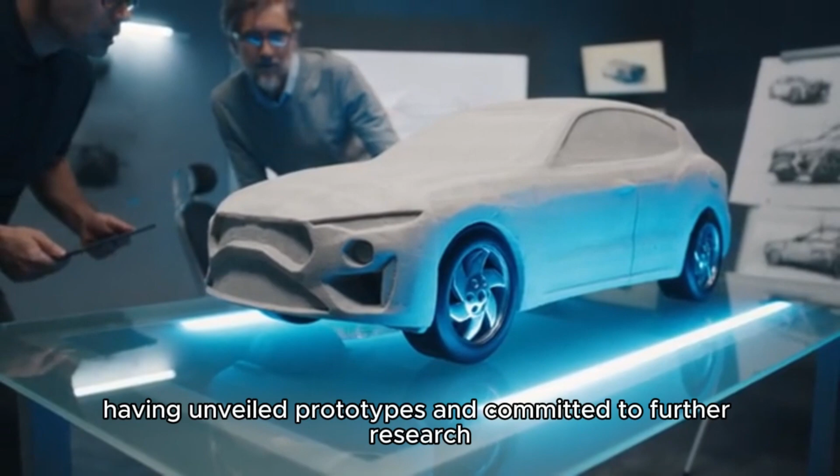Rivian, an electric vehicle startup backed by major investors like Amazon and Ford, represents another competitive force. While Rivian currently focuses on electric vehicles, their innovative approach and substantial funding could enable them to pivot toward water engine technology if the market demands it.

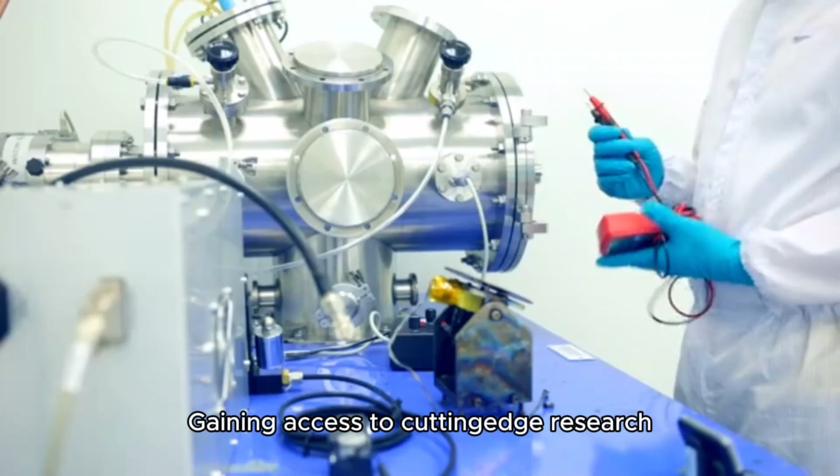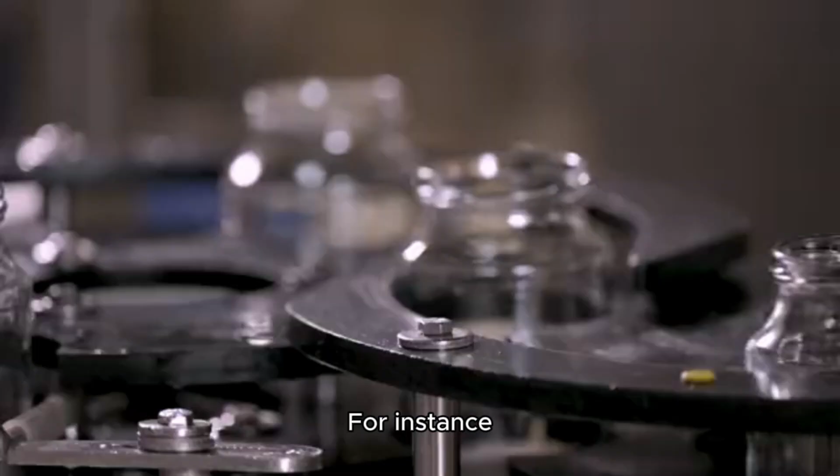Working together is essential to the quick development and widespread use of water engines. Tesla has a track record of establishing tactical alliances to further its technological objectives. Gaining access to cutting-edge research, specialist knowledge, and advanced technology can be accomplished by partnering with top tech businesses, universities, and research organizations. For instance, collaborations with universities focused on hydrogen research can help Tesla refine the efficiency and performance of its water engine. Partnerships with tech giants like Google or Apple could integrate advanced software and AI capabilities, enhancing the overall functionality and user experience of water engine vehicles.

So how will these collaborations shape the future of transportation? Will Tesla's partnerships pave the way for widespread adoption of water engines?

One of the most exciting features of the water engine is its smooth integration with renewable energy sources like solar and wind power. Utilizing electrolysis to create hydrogen using renewable energy, the water engine can operate with minimal carbon emissions. To produce hydrogen in a completely environmentally friendly manner, water is split into hydrogen and oxygen using electricity generated by solar panels or wind turbines.

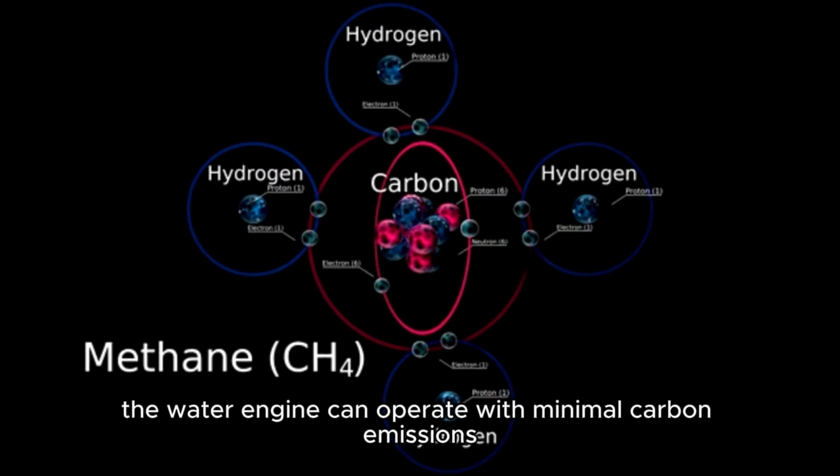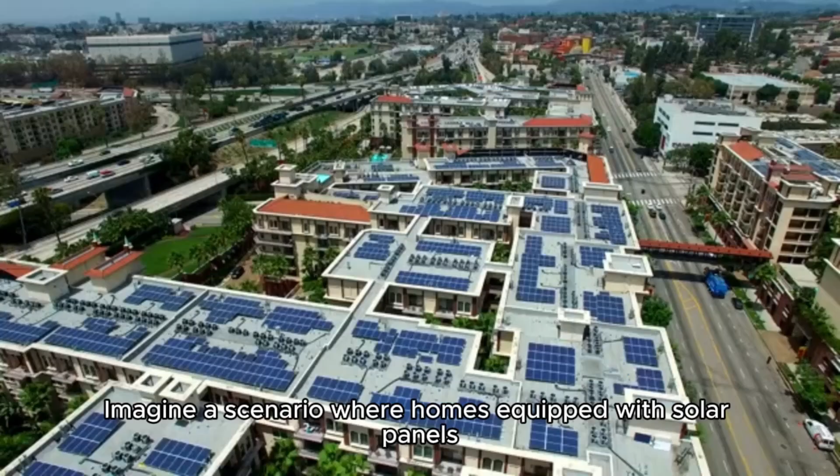Imagine a scenario where homes equipped with solar panels can generate hydrogen fuel during the day and use it to power water engine vehicles. Similarly, wind farms could provide both electricity for the grid and hydrogen for transportation, creating a synergistic relationship between renewable energy generation and sustainable transportation.

The impact on the energy grid could be transformative. Hydrogen production can serve as a form of energy storage, capturing excess energy during peak production periods and converting it back to electricity or fuel when demand is high. This ability to balance supply and demand can help stabilize the grid and enhance the reliability of renewable energy sources even when natural conditions fluctuate.

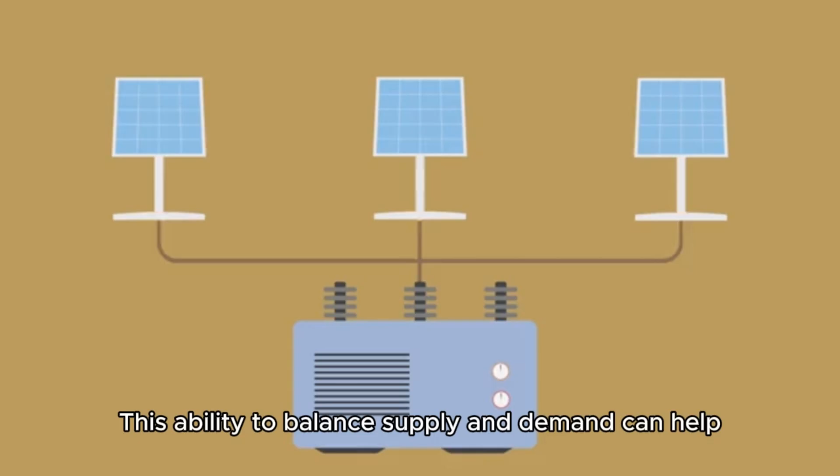The potential for global sustainability with these advancements is enormous. Initiatives could be considerably advanced if water engines are widely used. Water engines can significantly lower greenhouse gas emissions and air pollution by moving away from fossil fuels. A more sustainable planet, healthier communities, and cleaner air would all benefit from this shift.

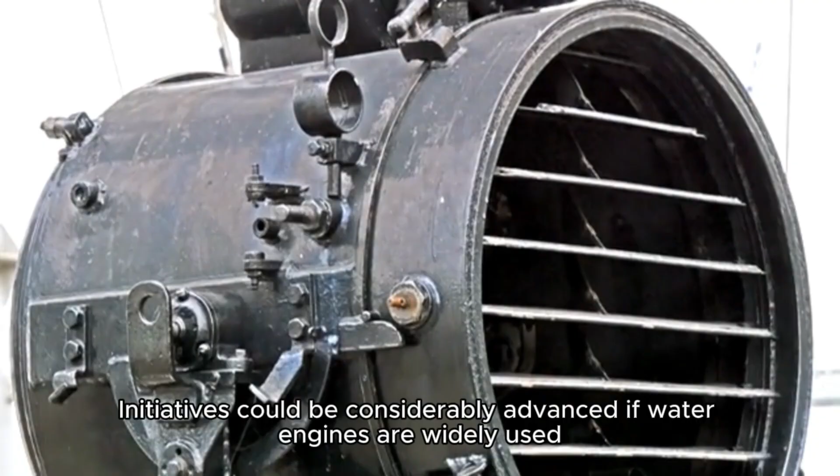Furthermore, the overarching objective of decarbonizing the energy system is supported by the integration of water engines with renewable energy sources. This technology has the potential to speed the transition to a totally sustainable energy environment by boosting the use of green hydrogen and encouraging the development of hydrogen infrastructure. When all of these initiatives are combined, the environmental impact of energy generation and transportation will be significantly reduced.

Elon Musk's water engine could influence global energy policies as countries seek to meet climate goals and reduce carbon emissions. The introduction of a viable clean alternative to traditional engines may prompt substantial policy shifts. The growth of refueling stations and the production of green hydrogen might be encouraged by government subsidies and tax breaks, which would increase support for hydrogen infrastructure.

These regulations can also include incentives for consumers to buy hydrogen-powered cars and funding for research and development. The shift to renewable energy would be accelerated by these actions, promoting universal adoption and infrastructure expansion.

The introduction of the water engine promises to dramatically enhance the driving experience for consumers. Unlike traditional internal combustion engines, which are known for their noise and vibrations, water engines, like electric vehicles, offer a quieter, smoother ride. This quieter operation enhances driving comfort and reduces noise pollution, making journeys more pleasant.

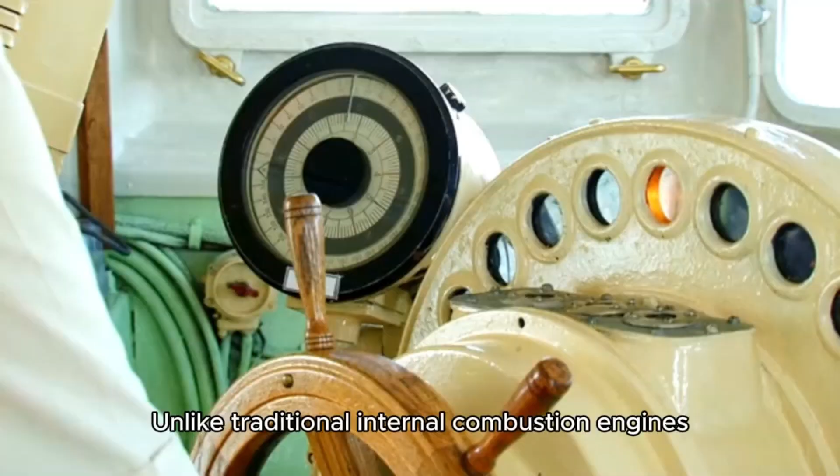When it comes to performance, water engines are comparable to electric vehicles in that they provide quick acceleration and instant torque. Driving can be more enjoyable and effective with this instantaneous power response. Furthermore, drivers may enjoy excellent performance without feeling guilty about the environment, unlike with traditional fuel sources, due to the water engine's pure energy output.

Cost savings extend beyond maintenance. As the technology matures and economies of scale are realized, the initial cost of water engine vehicles is expected to decrease. Combined with potential government incentives and reduced fuel costs, consumers could find these vehicles financially attractive.

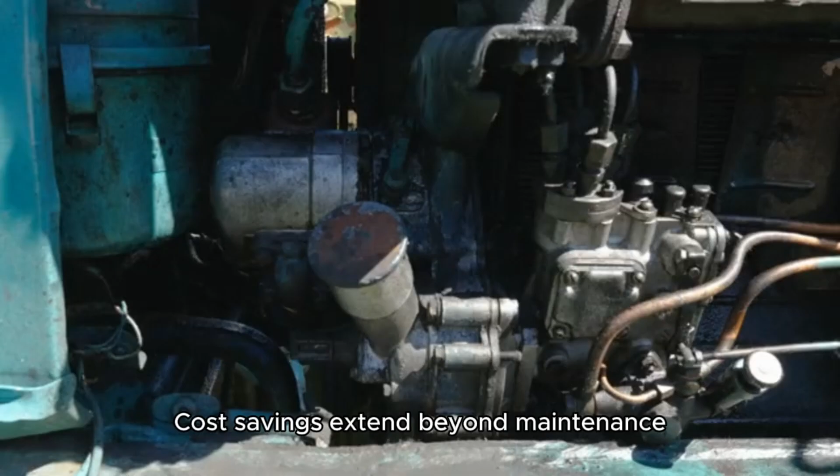Beyond automobile applications, the potential uses of water engines are enormous. Tesla is exploring the use of this technology in aviation, where reducing carbon emissions is crucial. Imagine hydrogen-powered aircraft that offer the same environmental benefits as water engine cars, potentially transforming the aviation industry.

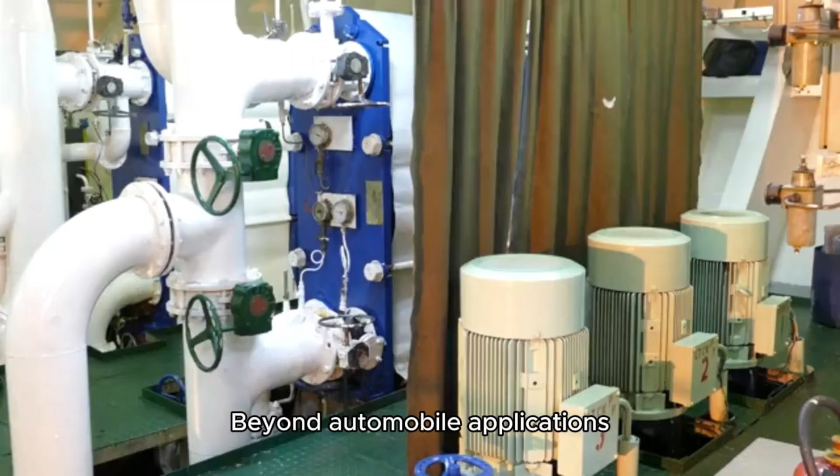Maritime applications are also on the horizon. Ships powered by water engines could significantly reduce the environmental impact of global shipping, contributing to cleaner oceans and air. In heavy industry, where energy demands are high, water engines could provide a sustainable alternative, reducing reliance on fossil fuels and cutting emissions.